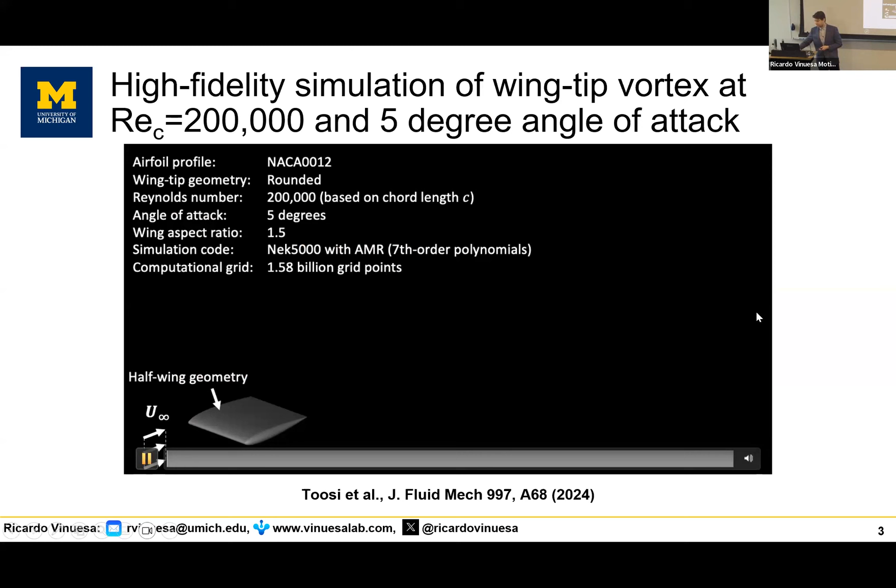And also, I want to show you a visualization illustrating some of the very high fidelity simulation data that we have been using over the years. So this is essentially a DNS. It's a NACA 0012 with a rounded wingtip, which means that you have the wingtip vortex and a bit more complexity than you would have otherwise. I'm showing you here vortices of vortical motions. The Reynolds number is 200,000, 5-degree angle of attack.

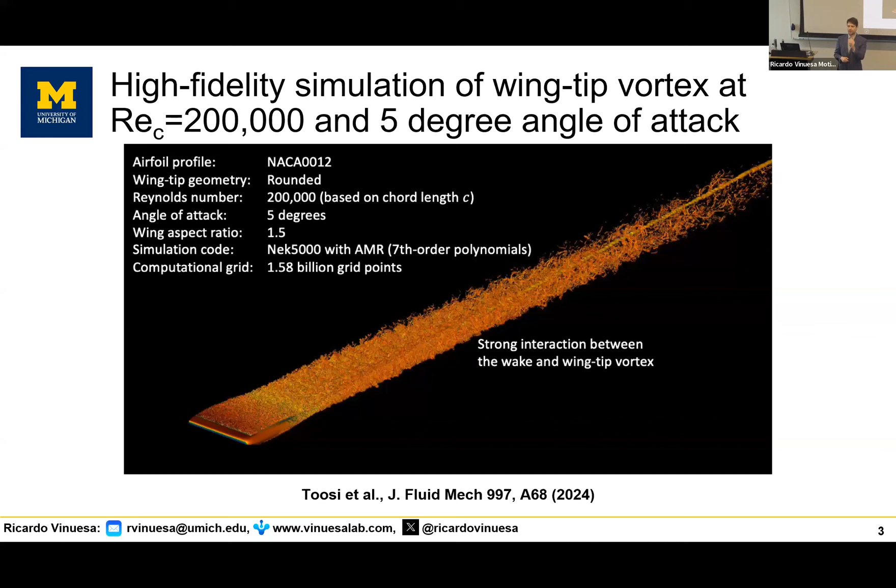This is about 2 billion grid points. So this is a quite large simulation using a spectral element method. And we also use adaptive mesh refinement to make sure that the details around the wingtip edge are properly captured in our very highly resolved simulations. You can see here the turbulent boundary layer on the suction side and how the wingtip vortex basically rolls around the wingtip, impacting the boundary layer here.

So we have a strong span-wise pressure gradient that is leading to some local relaminarization, and also how the wingtip vortex rotation is essentially pushing the wake down. And when the wake is pushed down, you basically have an additional component of the drag, which is the lift-induced contribution. So this data set really allowed us to understand in quite some depth, not only turbulence, but also how turbulence interacts with other phenomena like wingtip vortices, three-dimensionality, wakes, and beyond. And this data was obtained by Siavash Toosi, who was in my group a couple of years ago, published in JFM. We have a lot of high fidelity data on wings of different levels of fidelity.

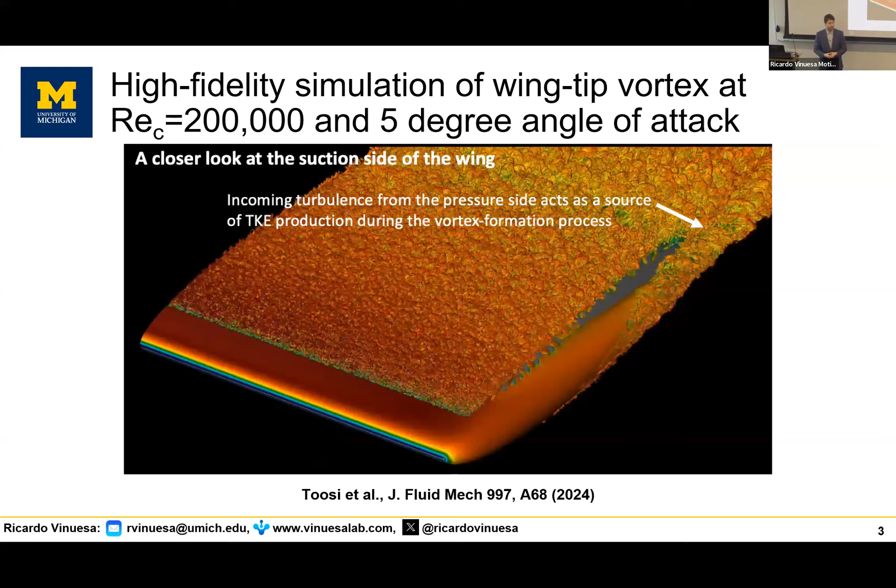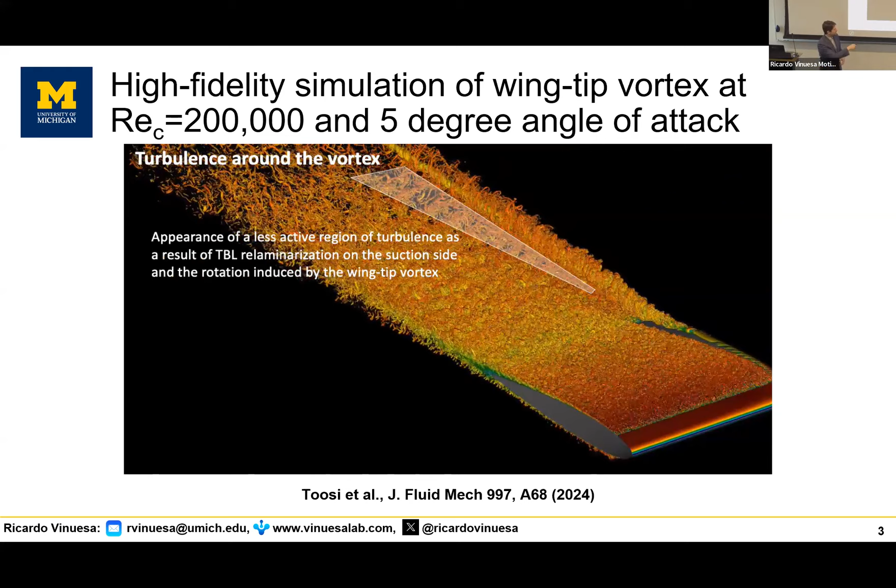And one note that I want to leave you here, I'm showing you vortices. The vortices are usually shown when people try to show you a nice visualization. They give you an idea of the chaotic behavior of turbulent flows, but there may be other ways to understand turbulence from a visual point of view and from a structure point of view that can help us to get some insight. So for now, just keep an eye on this coherence. So all these vortices show you certain coherence in the flow, which is, together with the chaotic behavior, one of the very important parameters of turbulence. So we are really using quite some high fidelity data to understand these complex flows. And the two main themes on explainability and control and foundation models for discovery and optimization will be connected at the end.

So if we start to think about flow control, one possibility to control the flow, if we look at coherent motions, turbulent behavior, what I showed you in the video, one possibility could be to first identify what are the most important mechanisms in my flow. So highlight the most important regions. And here importance is defined with respect to some target. So it could be drag reduction, it could be mixing, it could be reduced acoustics.

So for some target, I identify the most important features, which I highlight here in red. And then what I could do is try to target those structures in a very surgical way and nothing else. So if I want to reduce drag, I may want to minimize the structures responsible for drag. If I want to enhance mixing, I may want to increase the presence of those structures in my flow. And how can I affect those structures? That's through active flow control, which I will be talking about later.

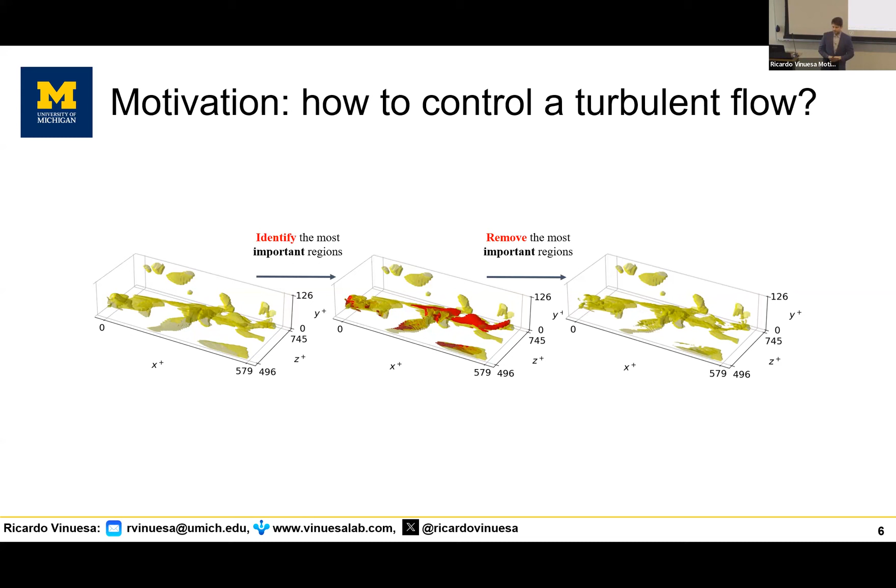So how do I identify important mechanisms in my system? We've been using this explainable deep learning framework for a while, but this is not the only way to assess importance. One way to look at this question of what's important in turbulence has been put forward by Javier Jimenez in Spain. He does this in an intrusive manner, basically introducing perturbations in my flow field and reintegrating the governing equations, so basically redoing the DNS, and then looking at what are the perturbations that grow the most. And in this way, one can get one measure of importance in my system.

Another approach by Adrián Lozano-Durán, who is another close collaborator of Steve and mine at Caltech. So they do causality and information theory. In this example, what they do is that they decompose their problem into time series with some modal analysis. And then they remove the information from one time series and assess the effect of that removal in the prediction of the other time series, therefore creating these causality maps that allow us to assess the system in a non-intrusive way. So you are not reintegrating the governing equations, you're just post-processing data and seeing how the different quantities are connected in this a posteriori assessment.

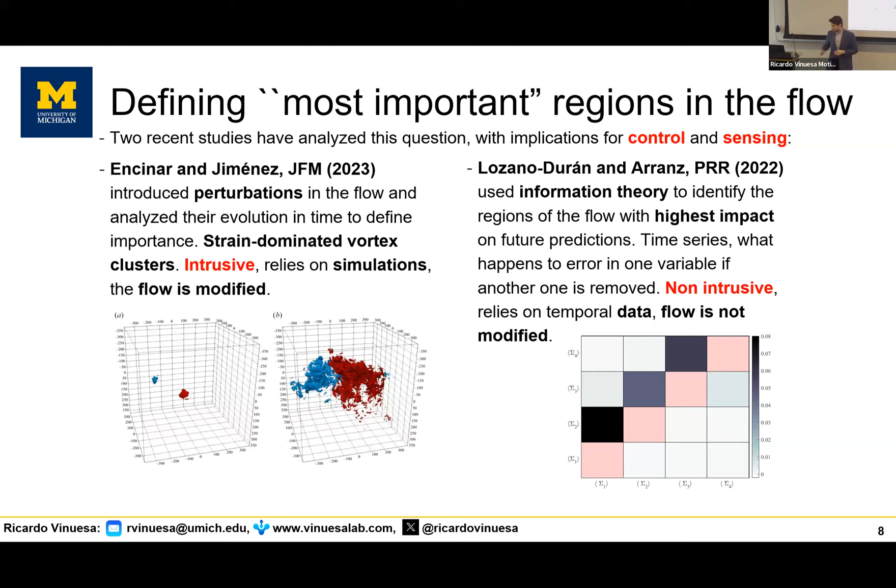What we propose is a bit in between, something that is intrusive but on a surrogate model and is based on explainability. So the first step is basically to create a surrogate model connecting an input and an output. And this work was developed mostly by Andrés Cremades, who was a postdoc in my group for a while in Sweden, and now he's a professor in Spain. We published 2 Nature Communications studies in the last 2 years on how to use some of these ideas for fundamental studies of turbulence. And in a nutshell, the method is as follows.

In my input, I would have basically my information for which I want to identify the important structures. In our case, it would be the fluctuations of U, V, and W now, so 3-dimensional fields of fluctuations. And in my output, I'm going to have the fluctuations of U, V, and W in the future. Okay? This has 2 purposes. The first one is to kind of mimic what Jimenez and Lozano-Durán did about importance in the context of forecasting, but also because we want to use this to reduce drag. And of course, an important contributor to the drag, in particular the friction drag, is turbulence. So if I identify what are the mechanisms that sustain the turbulence fluctuations, I might be able to affect quite significantly the drag.

So I have a time delay between the input and the output of 5 viscous units. This was determined based on the time scales of the near wall region. Our results are very robust across a range from 1 to 10 viscous units, which basically indicates that what we identify is representative of the near wall dynamics and not so dependent on the actual time step, but the range of time steps. And this lag is very common in causal analysis. You basically need to identify a time interval characteristic of the physics that you're trying to analyze. So in our case, the near wall region, few viscous units, that's the lag that we consider in our causal analysis.

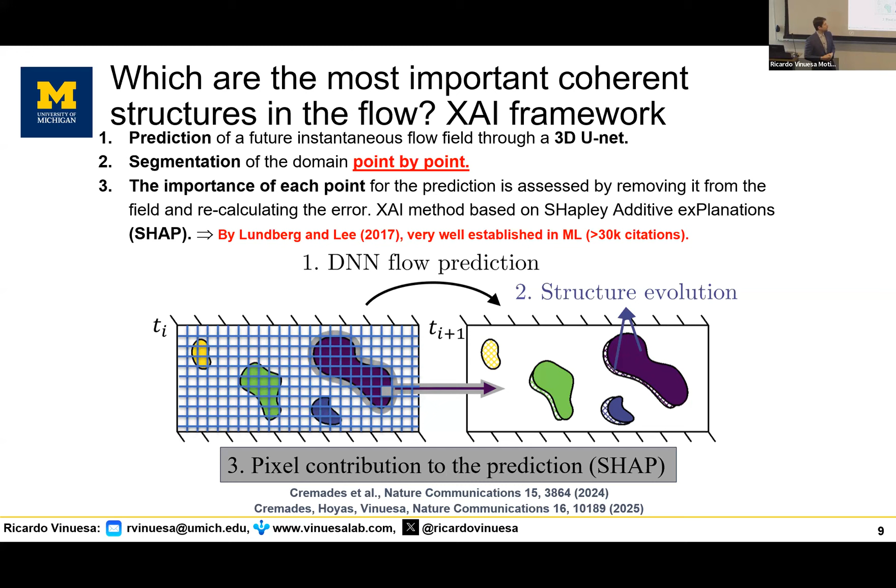And doing this approach, I have for each instantaneous flow field a three-dimensional distribution of importance, which we can then analyze. And through percolation analysis, I can identify coherent motions based on importance. Okay? So I can identify three-dimensional volumes of very high importance in comparison with other classically studied structures in turbulence. Vortices is what I showed you in the video. And you can see that they're actually very different from what we are identifying as being important. So you can start to think that maybe vortices, at least for this target, might not be the most relevant.

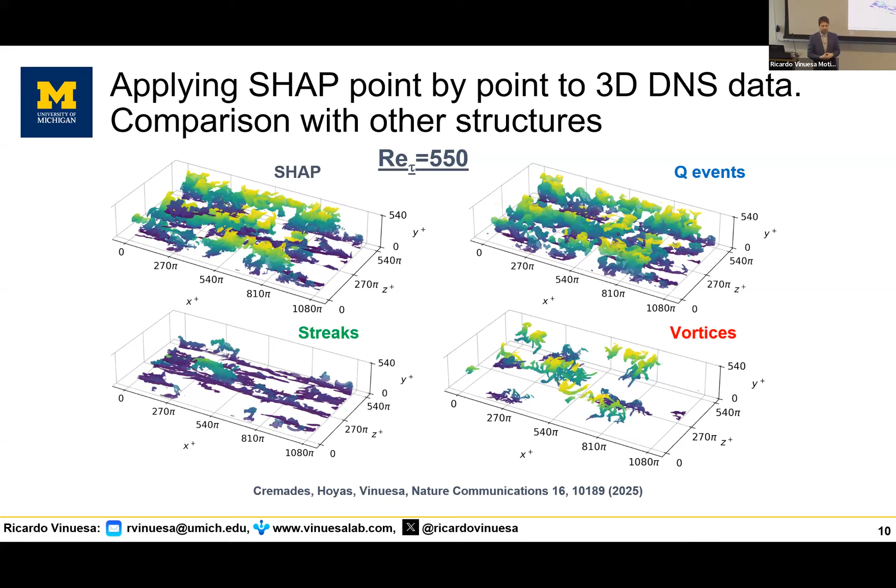These over here are the Reynolds stresses or intense Q events. Those ones look a bit like the SHAP structures, actually, at least visually. And here at the bottom, I'm showing you the streaks, which, as is known in the classical literature of turbulence, play a key role in the near-wall production of turbulence. So what we did was to try to compare these types of structures first from a statistical point of view, basically looking at the joint probability density function. So statistically, what are the properties of each type of structure?

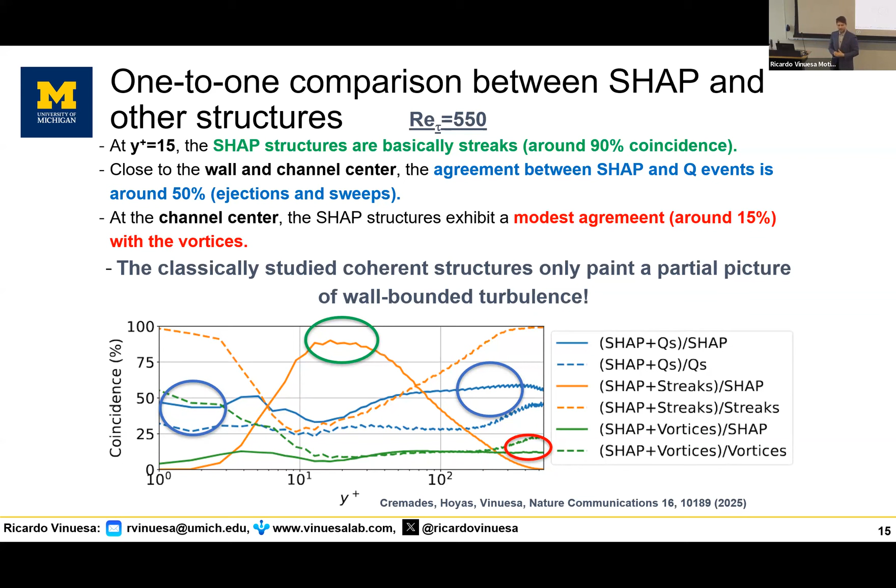In other words, this is a bit the story of the three blind men and the elephant. Sorry for the people in the session before, they have to see this again.

But basically, you know that three blind men are asked to describe what is an elephant. The first one says that an elephant is a snake because they're touching the trunk of the elephant. The second one says that it's a wall, and the third one says that it's a rope. That's basically an example of partial information, right? And none of them is technically wrong, but none of them is telling you the whole story. And that's a little bit what we see with the classical structures. They're only looking at importance for part of the events that matter for a whole turbulent flow.

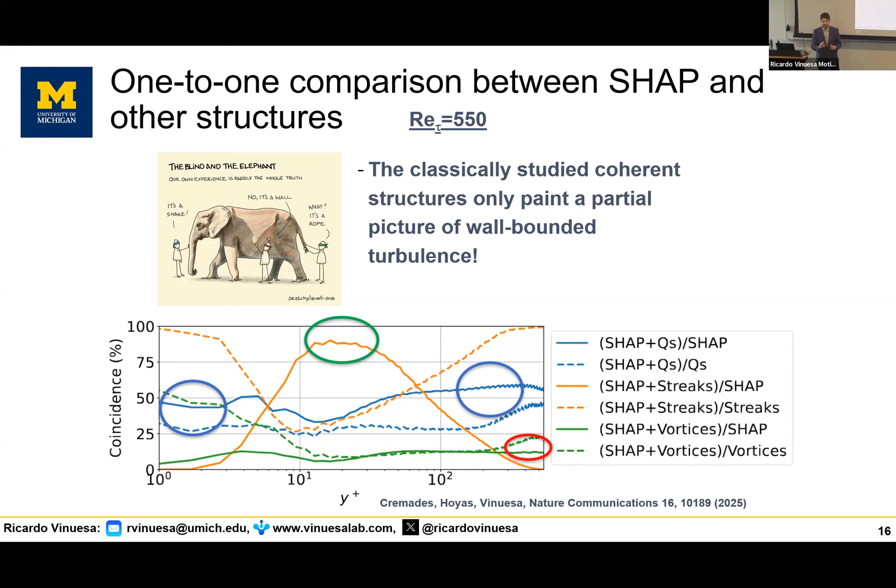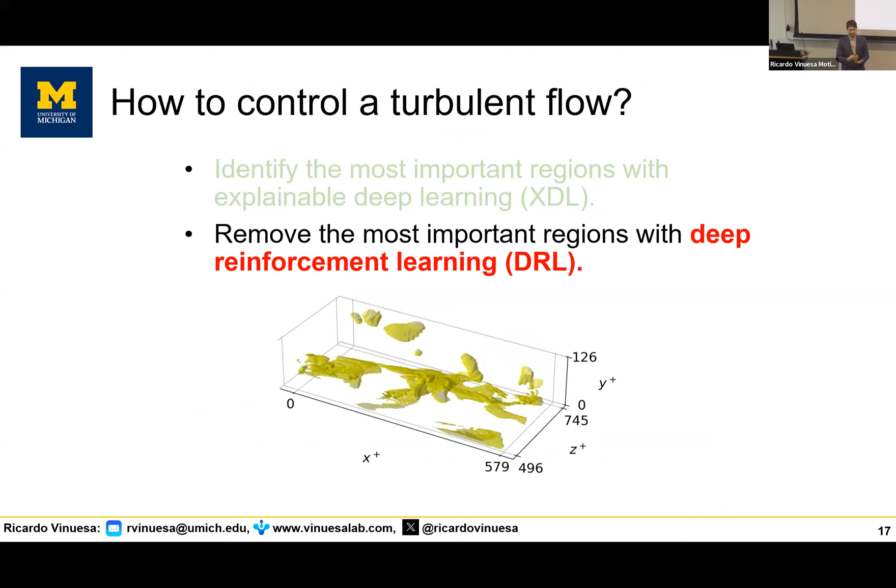So this is about what we have been using and developing with importance-based explanations in wall-bounded turbulence. And once we identify what's important in my system, then I can try to control those things. And to do that, we have been using deep reinforcement learning. So we were quite pioneering on using reinforcement learning for turbulence control. This is a small summary of what reinforcement learning is doing, although I guess in here mostly everybody knows about it.

So you have an agent interacting with an environment, which is our flow system, either through an experiment or through a simulation. That interaction is through actions, which are essentially, in our case, blowing and suction. So we're going to consider active flow control with jets on the surface that are sometimes going to blow air and sometimes they're going to suck air. Those actions are changing the state of the system, which is our observation of the system. And they're also changing the reward. And the reward is a measure of the quality of those actions under a certain norm.

So the idea is that this is trained stochastically, such that we are rewarding the actions that allow us to increase the reward. And once we train this system, then this is evaluated deterministically in such a way that a policy pi is created where, given the state of the system, we will receive the actions to take in order to maximize the reward.

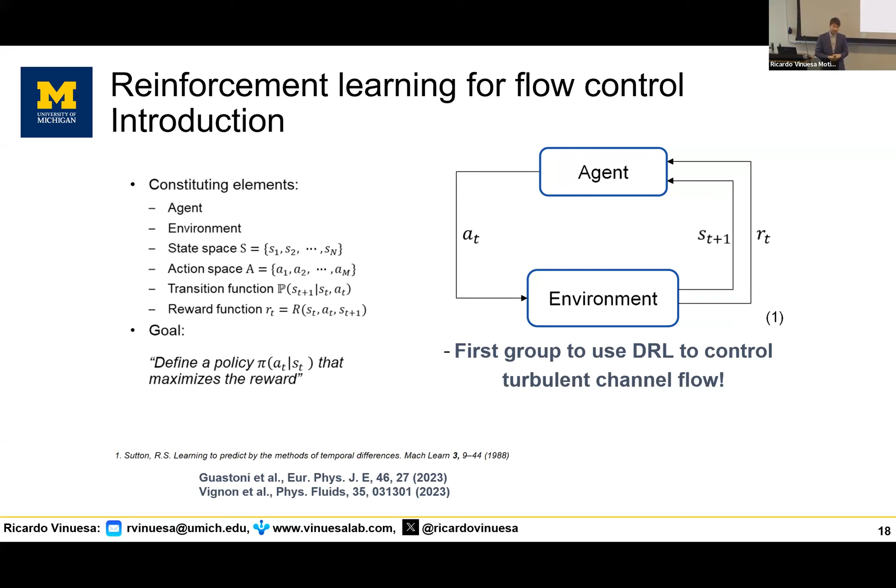And this was work done a lot by Luca Guastoni at the beginning, who was a PhD student in my group. Now he's a postdoc in Munich. He did fantastic work on this. And you can have here a review paper on reinforcement learning and control for many applications in fluid mechanics. So that's kind of like the main idea.

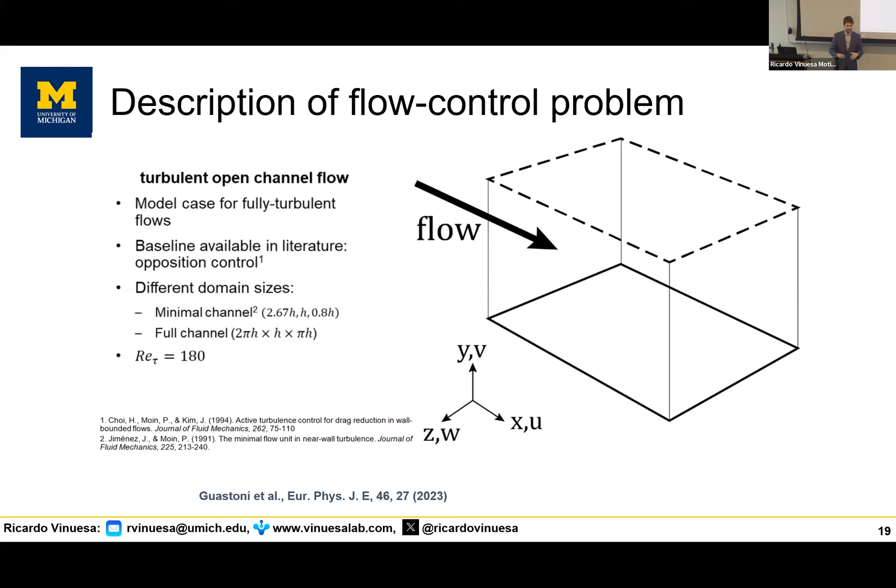We consider turbulent open channel flow as a benchmark. This is a channel with a single wall. At the upper boundary, we have a symmetry condition, simply to simplify a bit the control implementation. The results with two walls are identical. In terms of the control performance, the flow is a bit different, but the control performance is the same. And this is at Re_tau 180, which is a low Reynolds number, but turbulent, where we consider both a minimal and a full channel.

And our classical benchmark is opposition control, which is described here. This is a method that is 30 years old. It's essentially a linear proportional control. So if this is your wall, you will sense above the wall, typically y plus 15, the vertical fluctuations. And in opposition control, if you have a positive v fluctuation, you do suction. If you have a negative fluctuation, you do blowing. So basically, it's a linear proportional control trying to cancel out those vertical fluctuations.

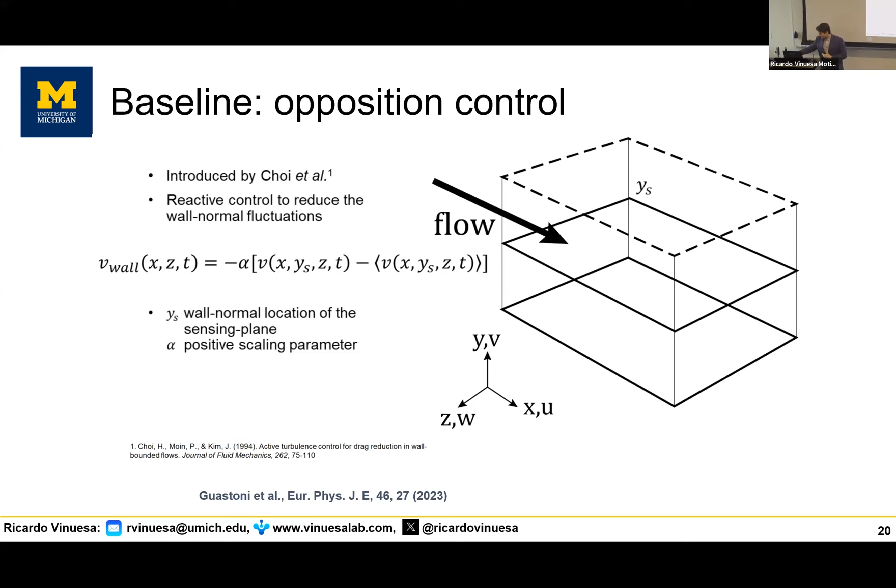Which, of course, works well, but one could expect that maybe through reinforcement learning, we can learn a much more sophisticated mapping between the state and the action than simply a linear control. And that's a little bit what we try to do with our framework for multi-agent reinforcement learning training. So one of the keys to control turbulent flows where the dimensionality of the system is very high is to parallelize the training.

So reinforcement learning works through gathering experiences, and that's very expensive. It is not very sample efficient. You need to run many simulations to expose your agent to enough situations such that you can train and learn what are the policies that work best. And that's, of course, very expensive.

But what we did here, and this is work that we published also with Steve in Nature Reviews Physics, this is an experimental implementation, is the following. So if you have a turbulent channel where you have two homogeneous directions, the flow is periodic in the streamwise and spanwise directions, that means that each of these blocks, each of these environments is seeing a different instantaneous realization of your flow, because you have your turbulence doing different things in different places, as you saw in the video. But because the flow is homogeneous in both directions, the statistics are the same.

The flow is homogeneous. So each of those points, if you average for long enough, will give you the same statistics. So in essence, what we're having here is a bunch of different regions with different observations of the same statistical problem. So that's one key. The other key is that all these pseudo environments share the same parameters, so the agent is the same. So now we have the same agent with the same parameters, seeing a lot of simultaneous realizations such that we can really accelerate the training.

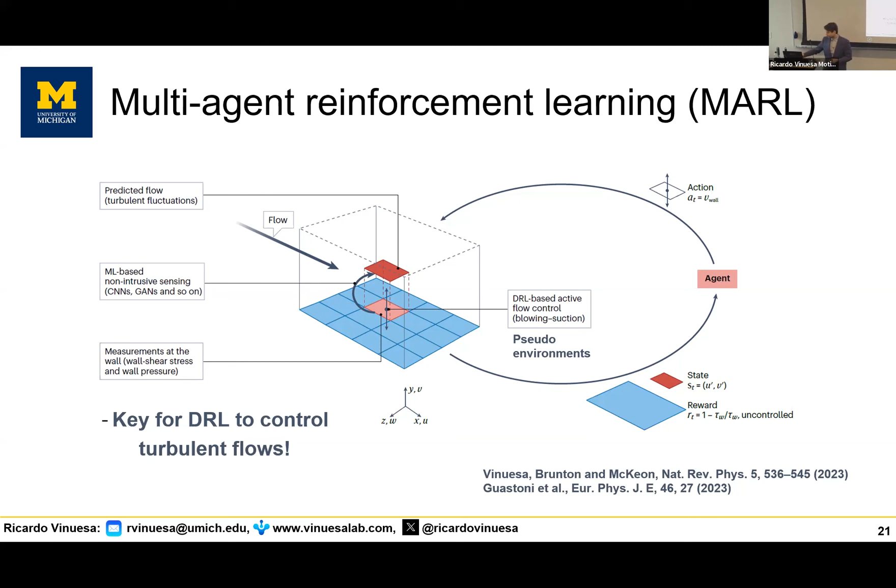So the performance here, where the reward is the friction reduction in a turbulent channel, and these results were by Luca 3 years ago. The reinforcement learning gives me 30% drag reduction. The opposition control, which is the linear traditional method, only 20%. So we can do significantly better than opposition control by coming up with a policy that is going to be something much more sophisticated than simply linearly opposing the fluctuations. So this is a huge improvement.

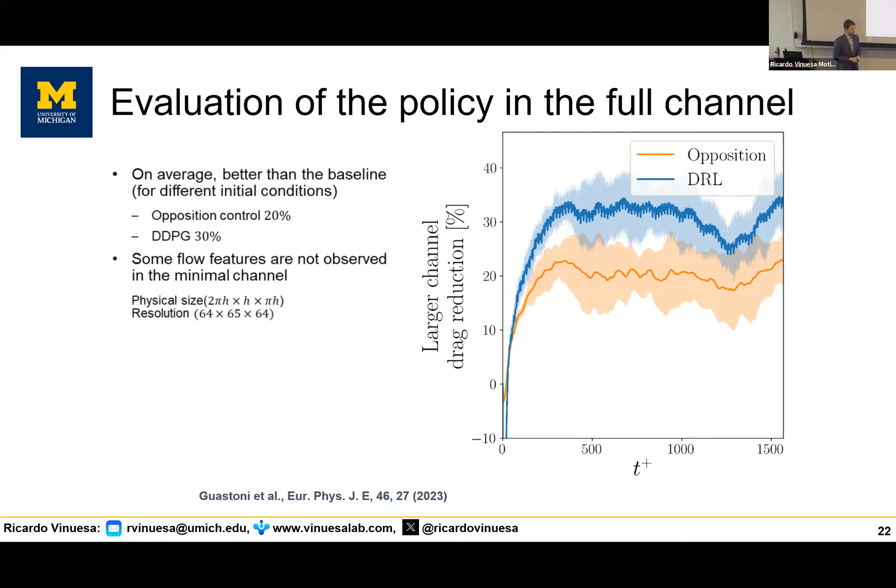But more interestingly, can we come up with a better reward to train the reinforcement learning? I told you at the beginning that we want to identify what's important and use that to guide my optimization, my training of my agent. And this is work that we did with Miguel Beneitez, who was also a postdoc in my group. Now he's faculty, he's a professor in Manchester. Andres Cremades was also here, and Luca was also here. Everybody was involved in this study.

And we're going to compare for the same setup, a channel flow at Re_tau 150 where we do blowing and suction at the wall, different rewards. In orange, the naive drag reduction. So the reward is to reduce drag, which is the 30% that I showed you before. In green, I'm going to show you what happens if the reward is to minimize the Reynolds stresses. In red, to minimize the streaks. And in purple, to minimize the SHAP. So to minimize the most important structure in the flow. And this is what the results look like.

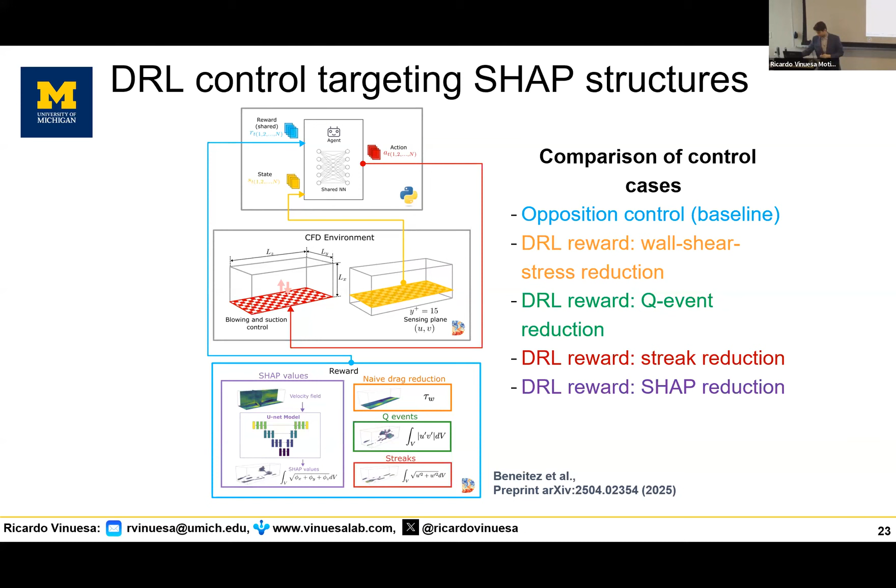What I'm showing you here is drag reduction as a function of time. In orange, you have the curve that I showed you before, reinforcement learning for friction. That's 30% drag reduction. And you can see that it has quite some oscillations. In purple over here, you can see the reinforcement learning for SHAP, for the most important structures, and that's 5% better. You can see that the line is above the orange one. And also, the oscillations are much lower.

Right? So this kind of shows that the drag is, in this case, the symptom, and the reinforcement learning for drag is treating the symptom, whereas the SHAP is identifying the underlying disease, the underlying root cause of that symptom, which are the important structures responsible for the drag. So in the purple line, in the SHAP, what we do is that we have a much more surgical approach. We're targeting the mechanisms and not the output of those mechanisms in my control.

In reality, what happens with the reinforcement learning for friction is that we learn a bang-bang control. So basically, it's trying to destabilize all the near-wall region, whereas the reinforcement learning for SHAP is just destabilizing certain structures that are key in the near-wall region. That's why it has lower oscillations and it achieves better performance.

This figure also shows an interesting result. When we minimize the Reynolds shear stress and the streaks, we get worse performance, which basically confirms that the SHAP structures are actually the most important. Because when we inhibit their presence in the flow, we get the highest impact in drag and turbulence features. This kind of confirms that our SHAP analysis makes sense, and also confirms our hypothesis that guiding the reinforcement learning algorithm through explainability could be potentially a good idea.

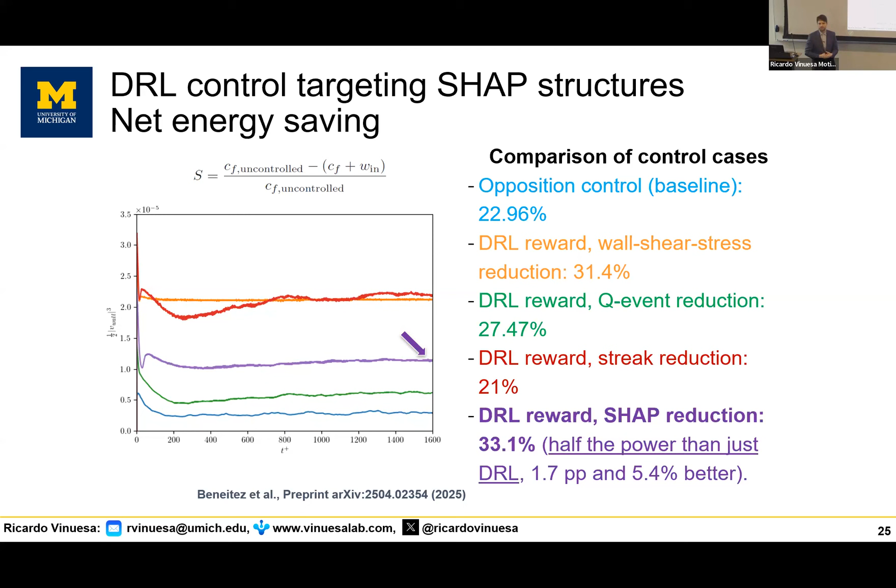Of course, at the beginning I showed you a very nice wing visualization, and then I've been doing everything with the channels, so I don't want to disappoint you. We're going to do some things on wings as well. This is a DNS that we did 8 years ago. This is a NACA 4412 wing section. This is periodic, so it doesn't have the wing tip. It is spanwise uniform, but you can see that the streamwise development is consistent with that of a NACA wing. Adverse pressure gradients, a strong migration of near-wall turbulence from the wall to the outer region.

And the idea is, if we try to use reinforcement learning to control this system, well, it's not so easy, right? Here, I'm not going to be using SHAP. I'm just going to target drag directly. This was work together with my students, Junin Wang and Paul Suarez, who have also been very involved in the HydroGym environment with Steve. So many of these ideas are now also part of the HydroGym environment.

I remember one day Junin came with the first results of implementing the reinforcement learning on the wing, and I realized how expensive that was. I realized that I needed 3 PhDs, one after the next, to finish the training. That would not be feasible, right? We had to do something else. Because, as I mentioned before, this is very high dimensional. The boundary layer is developing in the streamwise direction, which means that I only have one homogeneous direction, the spanwise, and I have fewer agents to learn in parallel. In the channel, I have 2 directions. Here, I only have 1.

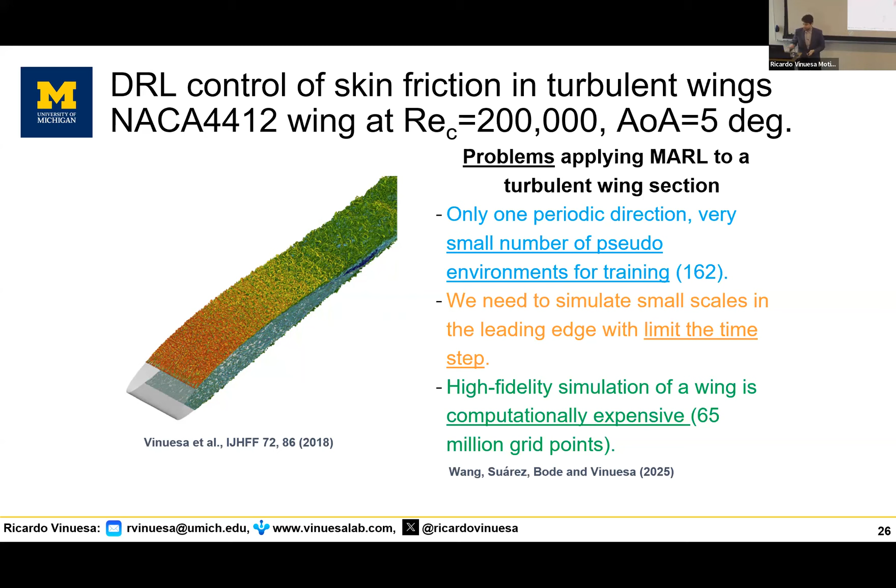And the other thing is, if I train here, I still need to simulate the whole wing, and I have very small scales in the leading edge that are limiting my time step. So I get limited by the very small time step of scales that I don't care about for my training. The other problem is that simulating wings is much more expensive than simulating channels, because you have 2 boundary layers, the wake, the far field. This is a much more complex setup. So then I had this idea: what if instead of going directly for the wing, we take the NACA 4412 and split it into different blocks, different regions, and then do the following.

I take this region here, I take its average Reynolds theta, which basically gives us an idea of the bulk properties in that region, and I define a channel flow, which can be as big as I want, with as many pseudo environments as I want, and I adjust my Reynolds bulk, so basically my streamwise pressure gradient, to match the same Reynolds theta that I have on the wing. So locally in the channel, I have the same properties.

Of course, in the channel we are assuming a locally parallel flow, but we are in a way encapsulating the properties of that region of the wing on a channel. And then I do my training on this channel and see if deploying this agent that was trained on the channel directly on the wing would work.

And this is beneficial from several points of view. The first one is the channel. Of course, I have 2 homogeneous directions, and I can make it as big as I want. So in principle, I have 20 times more pseudo environments in the channel than in the wing, which means that I'm going to be 20 times faster with my training.

Also, here, I take this portion of the wing and I define my channel based on these scales. So I only simulate the time scales that are relevant for that region. I don't care about the small time scales here, which means that my simulation can have a much higher time step because I only focus on the large scales on that part of the domain.

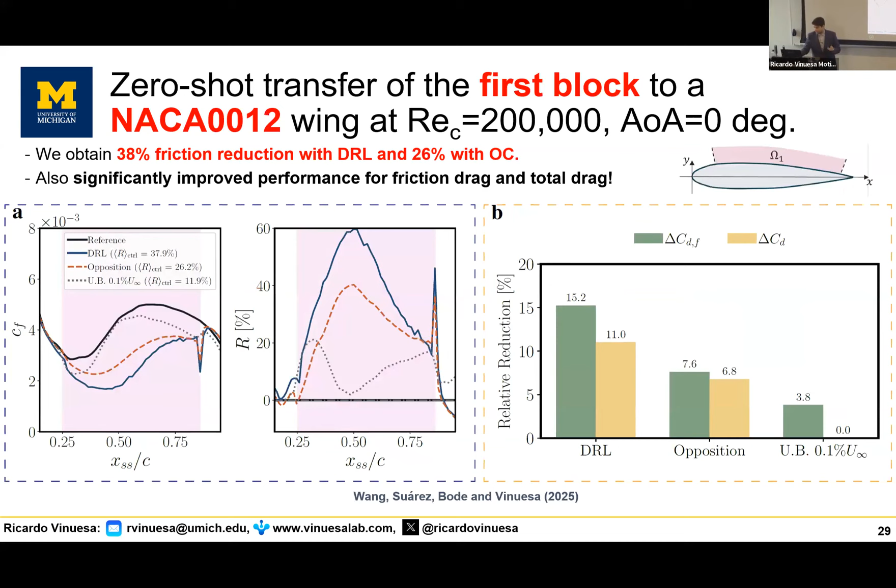So then the idea that I had was, let's go back to the NACA 4412 and do the following. We are going to take the NACA. We're going to do, first of all, uniform suction on the whole suction side. So all the jets are going to pull down. Uniform, so this is an open loop control.

And what happens when you do uniform suction is basically 2 things. The first one, you're inhibiting a bit turbulence because you're affecting the near wall dynamics. You are reducing the pressure drag because when you pull down the boundary layer, the wake is thinner, so you have less pressure drag, but you increase significantly the friction drag. By compressing the boundary layer, the velocity gradient close to the wall increases. So this type of control reduces pressure drag and increases friction drag.

So we first reduce the pressure drag, and then for this wing with the reduced pressure drag, we retrain on 4 channels, 1, 2, 3, and 4, with the new conditions. So we have now different Reynolds numbers on each of these regions, and I add another ingredient to this. I not only match the Reynolds theta, I also match the shape factor. Because now, this is a much less canonical case with suction and pressure gradients.

And to change the shape factor, we use something called body force damping, which is essentially a body force that we introduce in our channel simulation, inhibiting some of the near wall fluctuations, which is what happens when you do suction. When you do suction, you introduce a strong favorable pressure gradient, you inhibit the near wall fluctuations. So now I'm matching in my channel for each of these 4 regions, not only the Reynolds theta, but also the shape factor.

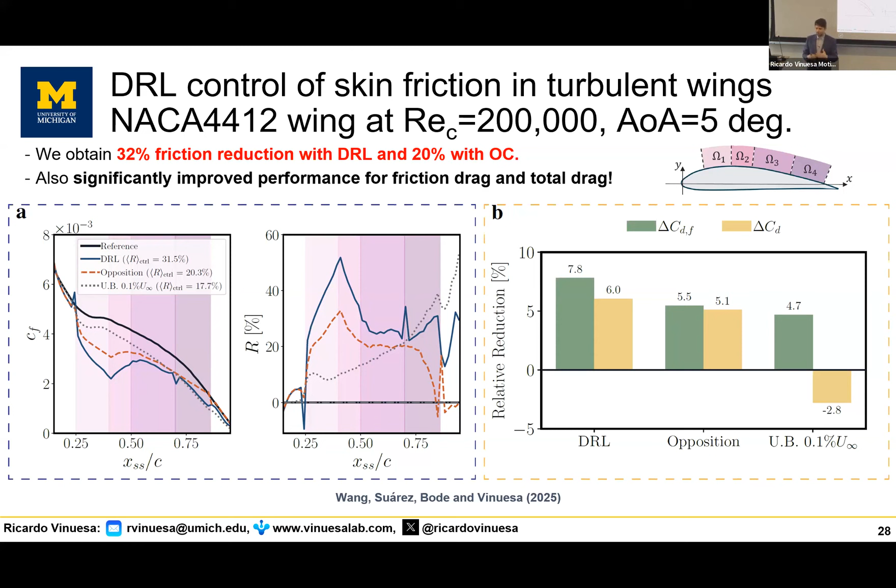And when I add the reinforcement learning, trained on the channels 1, 2, 3, 4, that's on top of the suction. So I'm actively reducing the thickness of the boundary layer, and then through the reinforcement learning, controlling the turbulence, which is already modified. But the cool thing is that I could reproduce in my channel that modified turbulence through the body force damping. So I could mimic in my channel conditions, not exactly the same, but representative of that new wing scenario, and go from 6% drag reduction to 10% drag reduction in this new setup.

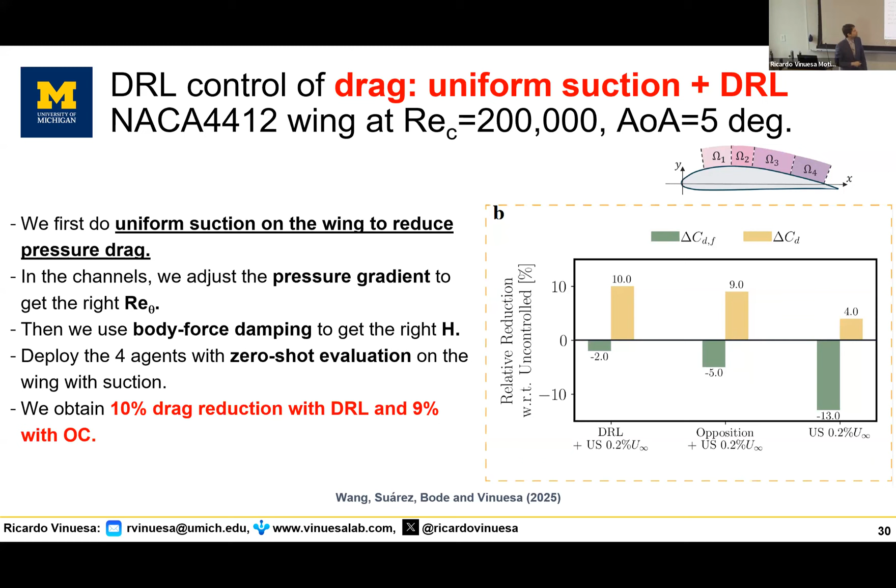And the opposition control also got better, because by actively reducing the pressure drag, it could focus on the friction reduction, but I'm still doing significantly better than the opposition control. So that's actually quite promising.

And of course, one idea of this is that you could potentially come up with very complex geometries and train a whole library of agents on very simple channel flows, mimicking the local pressure gradient, shape factor, span-wise pressure gradients, and then deploy all of them together in very complex geometry. It's kind of like a possible vision to implement complex control strategies in very realistic geometries by using what we know from simple canonical cases.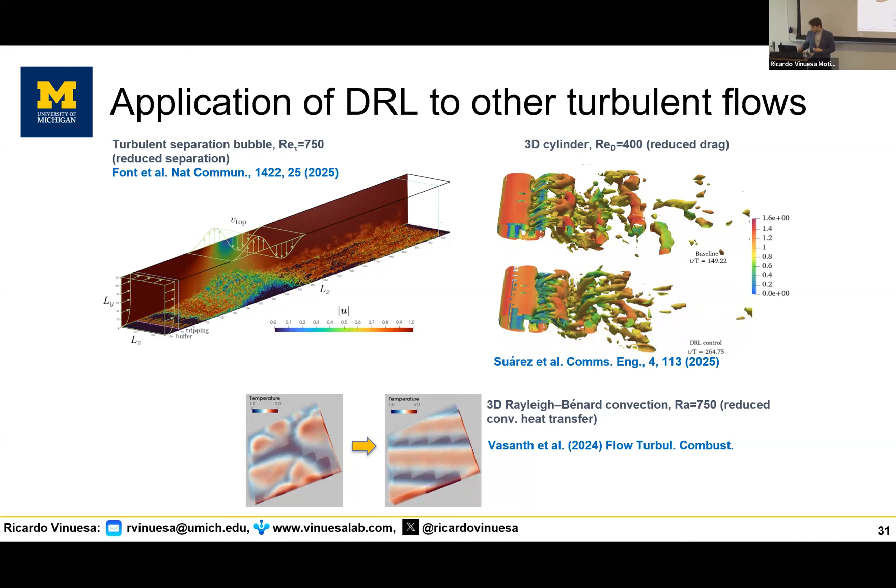So I see quite a lot of potential for reinforcement learning and control. And many of these ideas with explainability, causality, feed into the second part of the talk on foundation models for discovery. So some of the initial work in this direction comes from this review paper that Steve and I had a few years ago in Nature Computational Science. This was a review on how ML can help CFD. And already at that time, there were some people looking at this, but I think this review kind of helped to guide some of the research that came the years after.

Many people, for example, were focusing on trying to accelerate DNS. And we were not so sure that was a very promising direction, and not so much work was done after that. Improving modeling, so RANS and LES models, there's quite some work in that direction, but we identified the reduced-order model arena as the most promising one, and that effectively has been what people have been focusing on over the past 4 years.

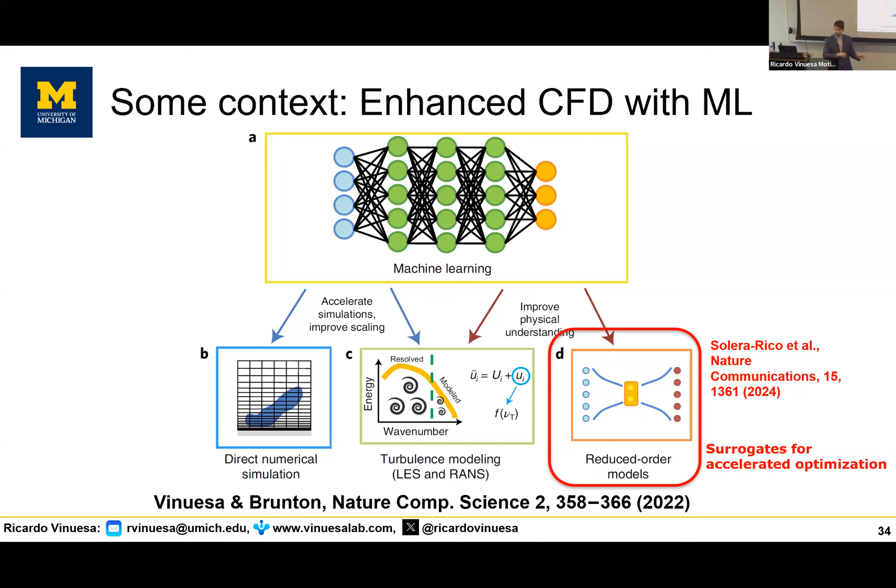We have since then published a couple of years ago in Nature Communications a study on how to build effectively nonlinear POD with beta variational autoencoders and transformers, in a way that the autoencoder would compress nonlinearly space and the transformer would model time. The key with the transformer, and we don't use a normal transformer, we use a particular type of transformer that captures the multi-scale interactions in turbulence, and that allows us to model the latent space in time quite well. So it's just a slide to show a little bit what we did there.

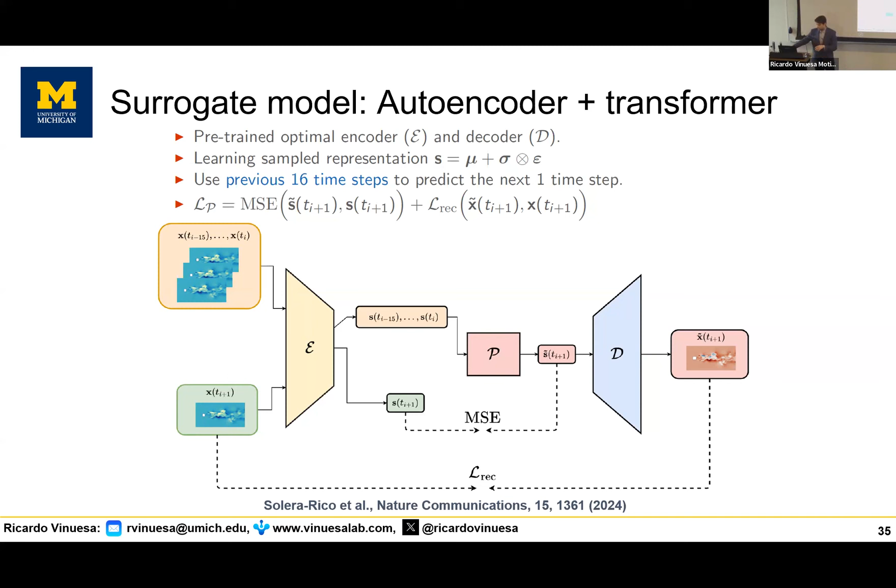Once you use your beta-VAE, your latent variables are basically vectors, and then the transformer can reproduce that quite well. We actually did another thing where we trained both the autoencoder and the transformer together in a composite loss function that gave us pretty good performance in some cases. So there are some interesting ideas here. But I don't want to get too deep into this, because the whole idea where we could extend these methods is to go towards foundation models.

So potentially having many different data sets from many different geometries, in this case, different wings, different flows around urban environments, we could potentially design models taking advantage of generative AI. And again, the beta-VAE framework can help in this regard. We could, first of all, build a compact latent representation where all these different geometries can go together and can be analyzed together. And then we could use explainable AI, so these ideas with SHAP, to essentially connect any physical insight obtained in the latent space with physical quantities that we can understand in our physical space.

And there is a whole idea here on how to generalize across geometries. We use a graph neural network, which basically takes geometries and creates embeddings for those geometries to be able to generalize quite well. I'll tell you more about it in the next slides, but basically we want to take from the existing cases a pretty good general approach to obtain data in new cases. And some details on this can be found in this review that we have with Steve and Gianmarco.

So let's assume that we have one data set, which is 4-dimensional, in this case, 3D in space plus time. And if we use the beta-VAE plus transformer framework, that's going to map into a 2D latent space, right?

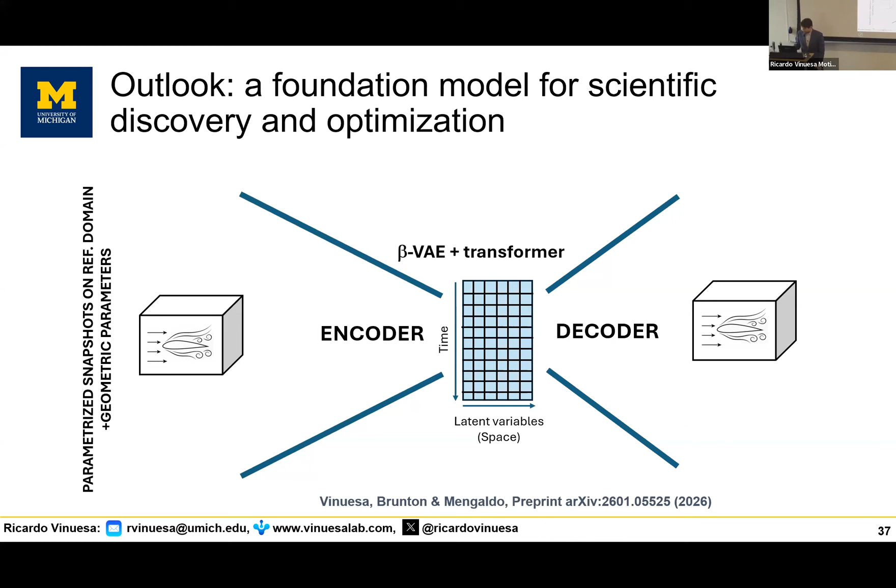But turns out that if I add more data sets, each of these data sets will map into a different plane of that latent space, such that potentially, well, I have a third direction, right? The third direction is going to be the flow case, meaning new geometry, new Reynolds number, new Mach number. You have a collection, a stack of 2D latent spaces, latent representations, forming a 3D latent space where this third direction is basically the flow condition.

And what we did was to learn this distribution here with conditional latent diffusion. So basically, we use a diffusion model for these planes. So we are basically learning images, and you know how diffusion works with noise and then denoise. And the prior is obtained through a graph neural network that is identifying each of these geometries that you have here. So the conditional latent diffusion model is going to generate a new plane here in the latent space, a new 2D plane, based on the embedding corresponding to any new geometry that I introduced in my model.

So if I want to do a wind turbine now, let's imagine, I will just encode that with my graph neural network, get the embedding. With conditional latent diffusion, I will create a new plane, so a new 2D representation for that new geometry, and then I need to decode it to visualize that in the physical space. Okay? And there are more details. You can read more in this paper.

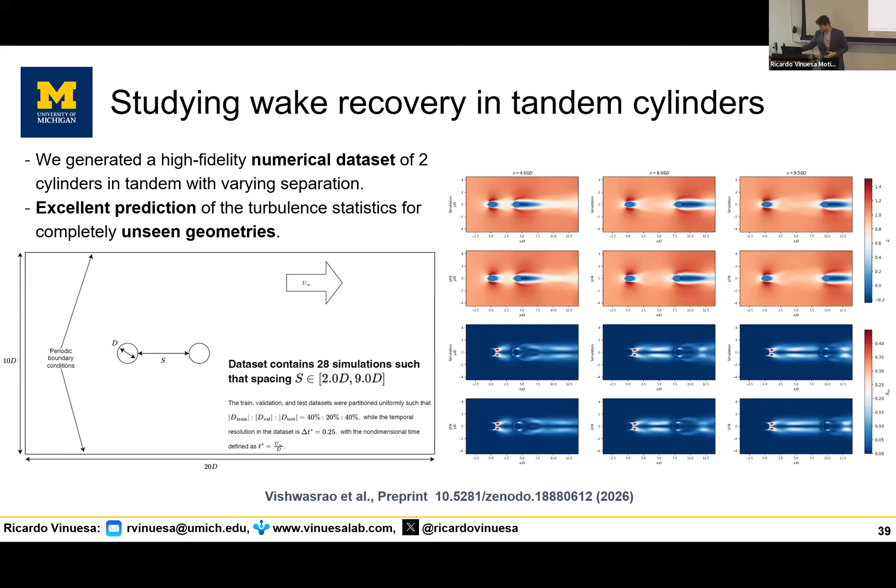So what we wanted to do, this is again two cylinders in tandem. So we wanted to systematically and autonomously explore the wake recovery between the two cylinders. And the wake recovery, one way to look at it is looking at the displacement thickness and the momentum thickness. And so basically, at some point when the second cylinder hits, you will have again velocity deficit, but there will be one point where those two quantities will be minimum. So we prompted this agentic framework to find this curve, and this agentic framework automatically and by itself decided what cases to run.

And running means generating a new geometry, decoding it, finding the snapshots in physical space, calculating the statistics, getting the point, and then looking at new geometries to kind of see how to build these curves. And this was built by itself by the agentic framework.

And of course, doing this, if we would ask a group of students to do this, that means that we'll have to remesh, rerun cases, calculate the statistics, decide the next case to run. Whereas in this case, we don't have to rerun any case. It was all purely based on the generalizability properties of the foundation model to new geometries, to new separation properties. So that was actually pretty cool.

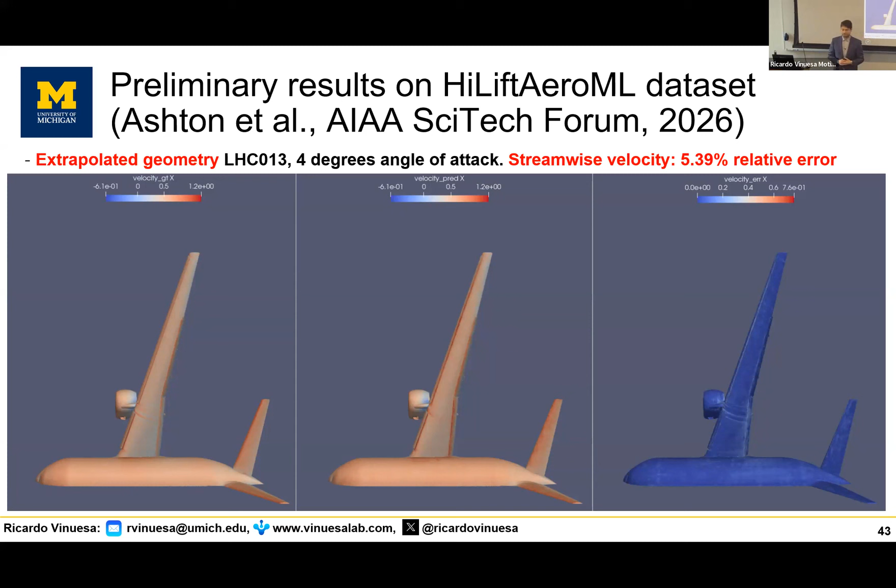And that's a summary of what I talked about today. We talked about the SHAP approach to identify important mechanisms in turbulence, but in other high-dimensional systems as well. Reinforcement learning as a way to reduce drag, and also combining SHAP and reinforcement learning to achieve even higher performance. And finally, I talked a bit about foundation models and agentic systems, which can be a revolution for scientific discovery and also design.

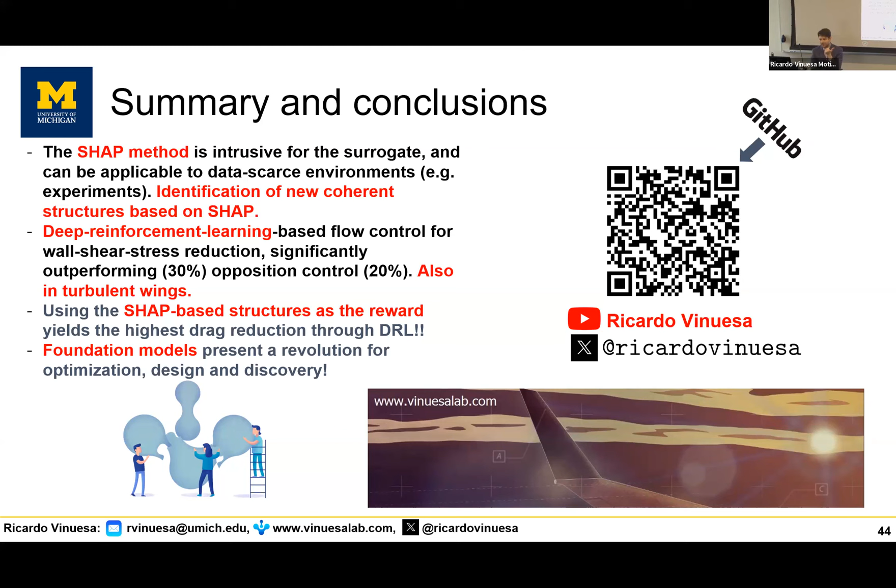So there is a quite interesting resemblance in the SHAP analysis going to different Reynolds numbers and to other geometries. I don't have the results here, but we've done it also on the NACA 4412. And then the effect of the pressure gradient impacts what are the important structures and what are not, so this distribution changes. The point is you can find some essential mechanisms across Reynolds numbers and across geometries, which can then be used later on for control.

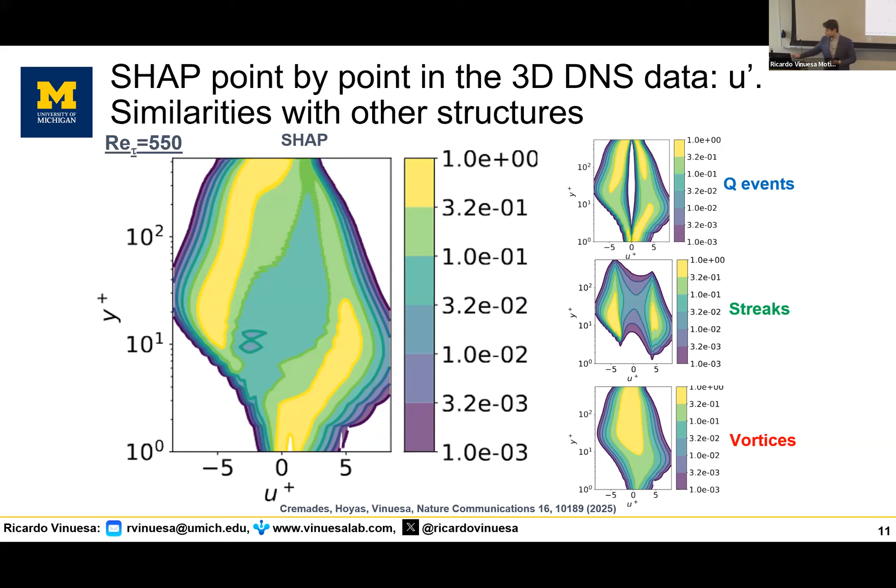I can tell you one thing. For the reinforcement learning with SHAP, these results are at Re_tau 180. Then we took this model without any retraining, zero shot, and went to Re_tau 550, with the SHAPs identified at 180 and the reinforcement learning trained for 180. We got a bit worse performance than here, not much worse, and we completely killed opposition control at 550. So there is a certain transferability of these important structures, which supports our belief that they play important physical mechanisms in the system.

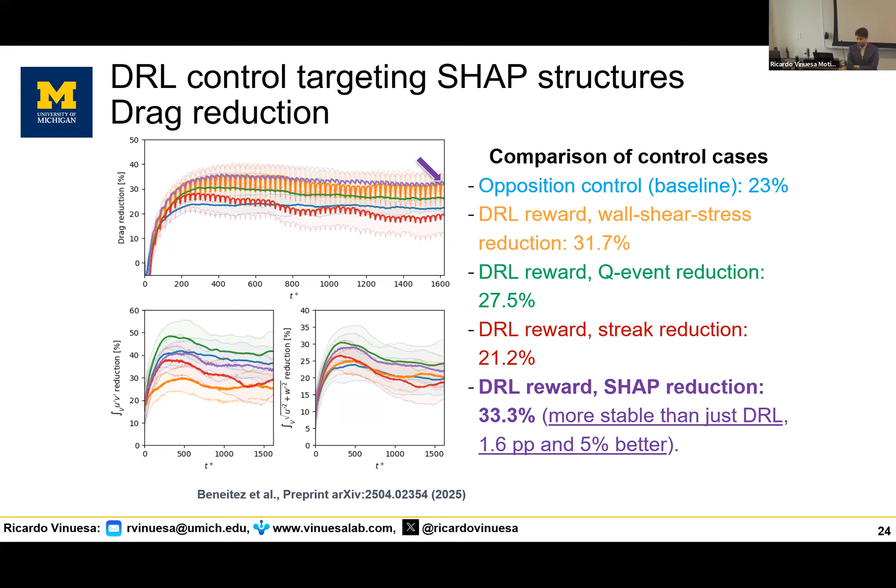So for example, if you want to use the same framework but for combustion, how would you do it? How would you include different physics within the entire framework? Yeah, that's a very good question. This is in our roadmap. So we want to go to multi-physics, which I think is where most of the value comes, because now I can have connections, causal relations across different physics, right?

And then is where the whole work that you guys are doing on UQ and active learning would come in. I mean, how does that compare with the other data sets, right? And well, in a way, the model would learn from the different sources, higher, lower fidelity. The experiments might give you a broader range of cases. So that could very well be also something that helps bring richness to the model.

Thank you. Thanks for the questions.

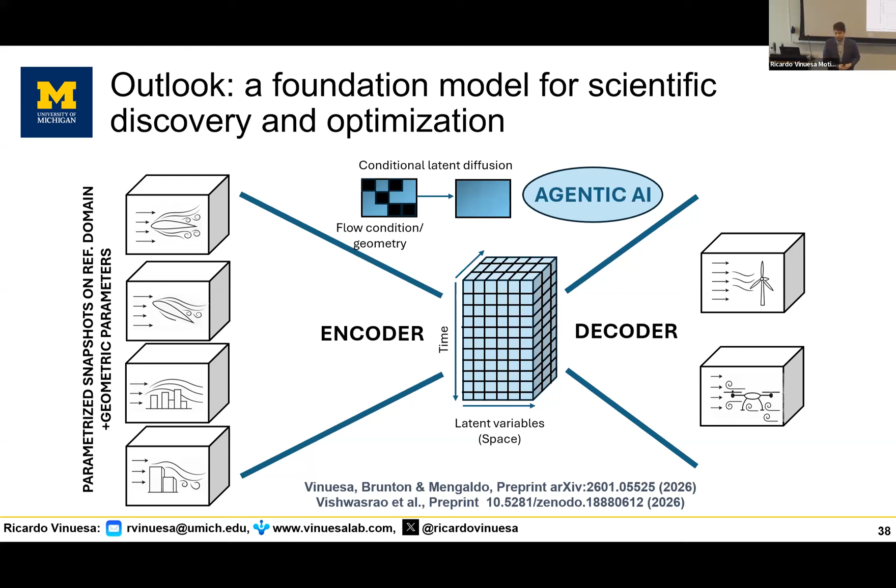So obviously here you said that implementing this even on a toy problem is a very good start. If you want to implement this on a more complex application, like the ones you're highlighting there, what kind of magnitude of data would you need? Because we know that transformers especially are quite data hungry, right? So have you explored that question, or do you have an insight?

Yeah, so we've been looking at this type of geometry, which is already quite complex. It's not full scale, because this is basically a wind tunnel model for a full aircraft, but still it has quite some geometrical complexity. So in this subset, using 100 cases, we found quite some generalization, and we're talking on the order of 100 million parameters for this model. Maybe it's 300-400. It's that order of magnitude. So we are not going into the billions of parameters yet.

The main idea, compared with much larger LLMs and so on, is that we can encode this data quite efficiently by looking at the causal relations that are important for the system. So we don't blindly represent the data by increasing the size of our network, but rather try to incorporate the important physical mechanisms in our system. So yes, they're not huge. We're training on maybe 4 GPUs, sometimes up to 8 H200s, but it's not gigantic training tasks. It's more about thinking before training, thinking how to design the latent space before training.

And another question on the error, just following up. So here you said that on the entire volume, the mean was something like 5%, right? Correct. Was there a big discrepancy between the error across the wing and across the fuselage? There were points with maybe 40% error, 50% error, and there were many points with 0% error. So of course there is some discrepancy there, and that's because we haven't brought any weighting on where we want to focus. We're giving the same weight to everything.